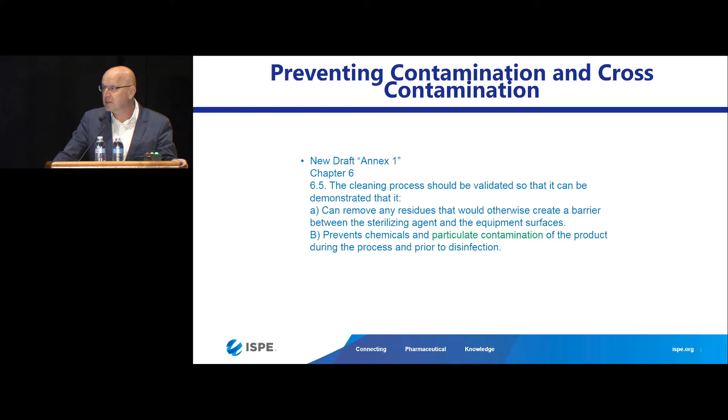As mentioned, my name is Richard Denk. I work for SKAN in the position head of containment, which means everything that has to be done on preventing contamination and also cross-contamination. We have heard this morning a lot about isolator technology. There's a lot in the draft Annex 1 about isolators. There's also mention of how to deal with highly potent substances, not much, but a little bit. My topic for the presentation is to explain preventing contamination, but then also what leads to cleaning and cross-contamination, because in the new Annex 1 draft there is a lot of mention of validation of cleaning.

So what were the current requirements? When we talk about aseptic isolators for aseptic processing, cleaning and disinfection are mentioned in general. That gets higher: in the new Annex 1 draft it is mentioned that this procedure should be validated, and this could be quite a challenge for a very complex process inside the isolator. And then afterwards we have an H2O2 decontamination. This is well established for isolators. More than 80% of all isolators are decontaminated with vaporized hydrogen peroxide.

But when it comes to potent substances, we have a few more challenges. One challenge is that we mostly have to produce those products in shared equipment or a shared facility. That means we have to take precautions regarding what we produced before the next product. Besides cleaning before disinfection to remove any bioburden, we also have to think about what was produced there, how toxic the product was, and what the risk is to the next product. And the risk to the next product is extremely critical in aseptic fill finish, because there we often have the container as the dose.

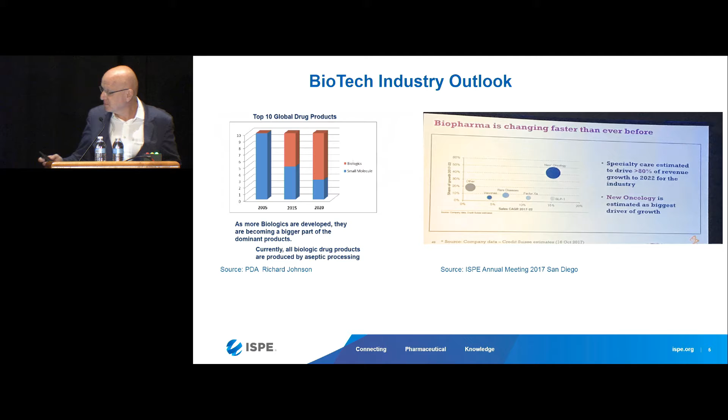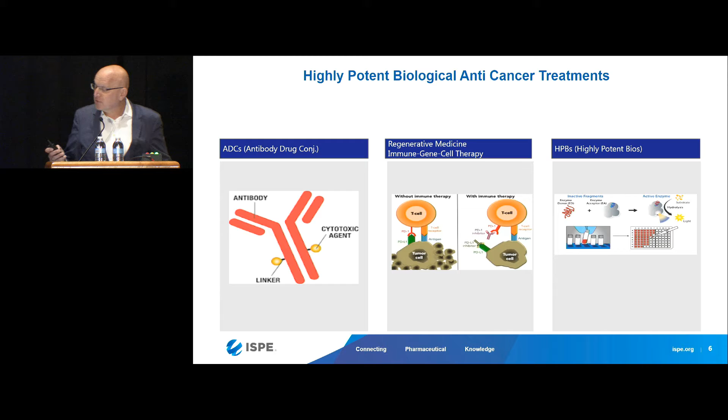So what makes them so critical? When we look at such a monoclonal antibody, which is attached here with a warhead or a toxin, this part makes that combination so powerful and also so toxic. Because this is a chemically produced small molecule which is linked to a large monoclonal antibody, and those are normally designed to specifically adapt to the receptor on the cancer cell, get inside, and then release the warhead to kill the cell.

And those toxins, when I present at such conferences where there are hundreds of people talking about antibody-drug conjugates, they always say we have the most toxic substance ever on the market, which is true. They were too toxic to be applied to the patient in another form, but most of them do not know how to deal with them and what it really means for the operator.

So, in general, containment, in my almost 25 years in that field, was in the beginning mainly driven by operator safety. We only spoke about how to protect the operators. This changed in 2014 as the EMA released the guidance on setting health-based exposure limits, because this guidance made containment GMP, since it requires permitted daily exposures for each product. And then the toxicologists have to develop a lot of data for this. It was first released in Europe, and in 2018 it was adopted by PIC/S as a guidance document. So in general, all PIC/S countries, which the US also belongs to, will be inspected according to this guidance.

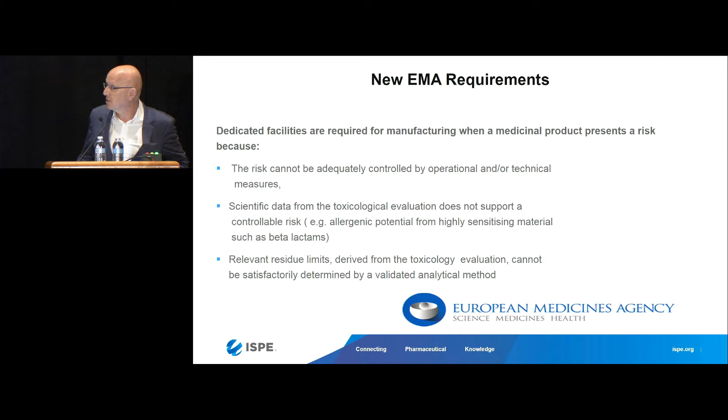So, as mentioned, I've been dealing with high-potent stuff for many years, and just to mention a little bit what could happen when ISPE is producing guidelines. The Risk-MaPP baseline guide was started, I think, in 2003 with the COP containment.

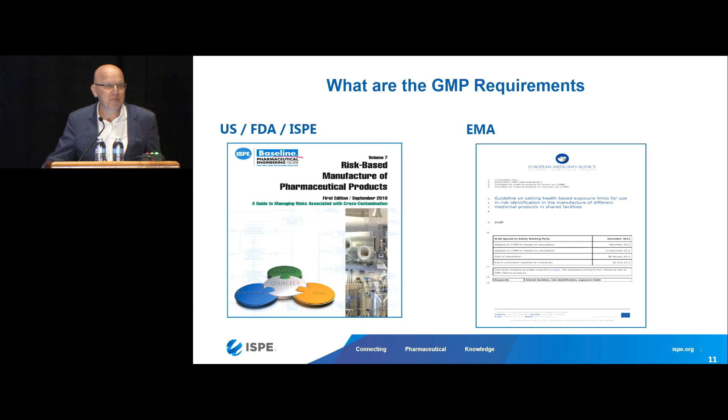It was then around 2006 first introduced to the EMA. In 2008, the EMA announced that they would revise their chapters. In general, the 2014 publication of the EMA guideline is similar to what was mentioned in the Risk-MaPP baseline guide. The only difference is the EMA guideline is mandatory, and the ISPE guidelines are mainly recommendations.

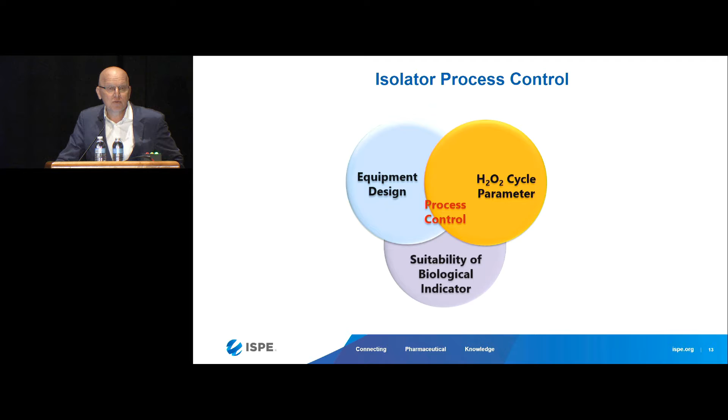So, to explain a little bit what we'll talk about, I would like to start and go quickly through decontamination of an isolator to get from there into the cleaning and cross-contamination part. In general, you provide an atmosphere inside an aseptic isolator where you decontaminate the surfaces, generally with hydrogen peroxide. You have to design the equipment inside so that it is possible to decontaminate. This was also a learning curve in the industry many years back, how to design surfaces and the equipment, and you validate it in general with suitable biological indicators.

So an isolator, I go a little bit quickly through, normally has HEPA filters in, HEPA filters out, and a terminal HEPA filter which provides the unidirectional airflow, which is mentioned in guidelines with 0.45 meters per second, plus minus 20%. And due to the high air volume, you normally recirculate the air.

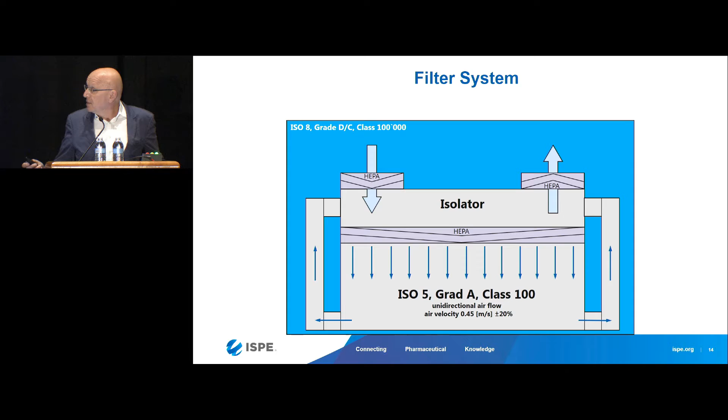And this has to be a little bit different when we talk about high potent, because there I teach that normally you have to isolate it in the smallest possible way. Every spreading outside of a critical area might be not easy to clean, and spreads product into other areas, maybe where other people like maintenance people could be exposed to it. And they often are not trained on how to deal with that.

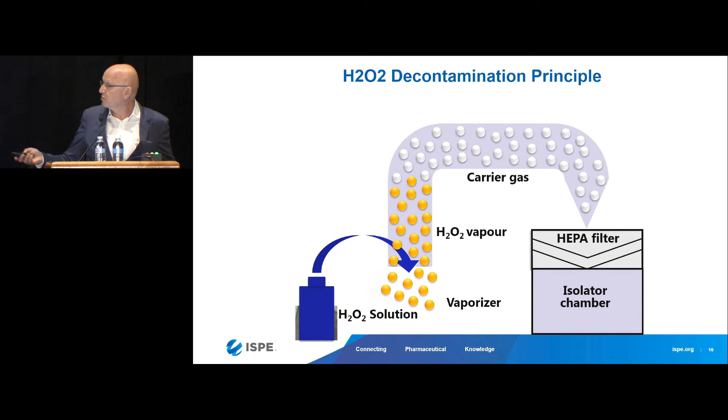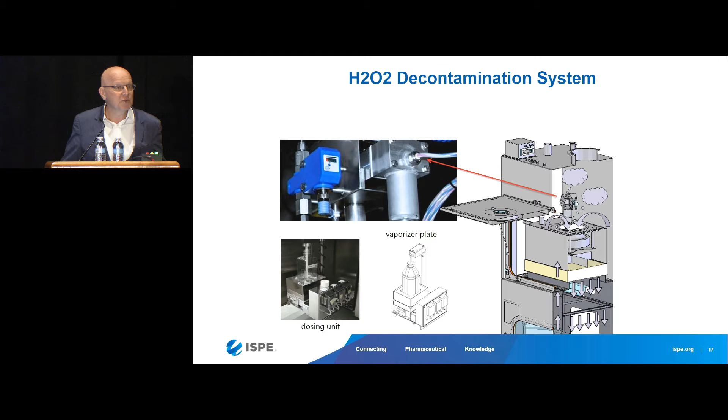So then you normally start the hydrogen peroxide decontamination. This is normally done with a bottle of 35% hydrogen peroxide; you vaporize it and get the gas through the HEPA filter into the critical zone, into the isolator, for decontamination. It's generally also called flash evaporation, because the boiling point of hydrogen peroxide is higher than that of water, and you pump the hydrogen peroxide with a peristaltic pump into the upper part of the isolator. On the heating plate, you flash vaporize it and get the hydrogen peroxide through the HEPA filter inside the chamber. It could also be performed in different ways. You can also get it directly inside the isolator. So those decontamination cycles are well developed.

It's normally done so that you make a leak test of the isolator first, make a preconditioning for temperature and humidity, and then you start the conditioning. That means you get the hydrogen peroxide inside the isolator chamber. Then you have the decontamination phase where you decontaminate all surfaces, and then you start the aeration to get the hydrogen peroxide out of the critical aseptic zone.

So I was recently asked, and it's always the question in such presentations, how innovative is the pharmaceutical industry? And I always say, when I go into the biotech field, I think it's the most innovative one. Because, as I mentioned before, I was many years in oral solid dosage forms. There, you had an agitator for the blending, and the most innovative thing was that you redesigned the agitator. This was then presented as the best you can get, and very innovative.

But within the biotech industry, when I look back, how fast all the disposables were implemented, how many new products you develop, which come to the market and sound very promising for the patients. The same here with decontamination of surfaces: the companies ask more and more for extremely fast cycle times, meaning very fast decontamination. And there is a lot of development going on, instead of flash vaporizing with temperature, using micronebulization, where very small droplet sizes are generated with a spraying system and directly injected into the chamber. It's quite important that these droplet sizes are in a specific range; the smaller they are, the better for fast evaporation into the molecular phase.

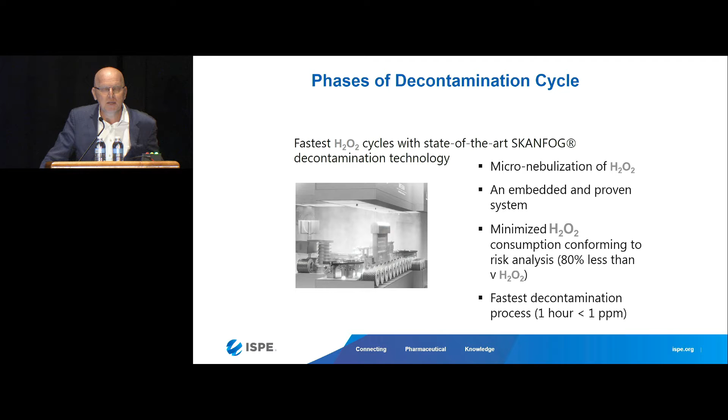So you spray them in, they get very quickly into the molecular phase and very quickly to the surfaces, and the larger ones are also important, because they need a little bit until they get to every area in an isolator, where they are vaporized a little bit later. So the distribution is quite important there. But with new technology, you can meanwhile reach decontamination within a few minutes.

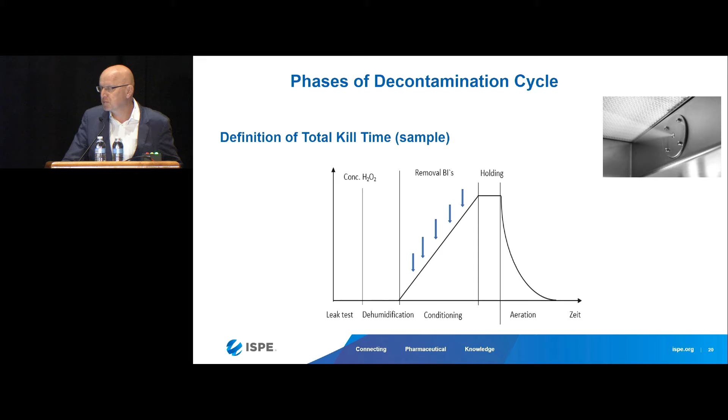Similar here, when you look at this, there is the same leak test, there is more critical dehumidification. Then you get, in a very quick way, the hydrogen peroxide in it, on the surfaces. The holding time, as I said, is minutes, then the surfaces are decontaminated. This also has the advantage that your aeration time is much quicker, because the H2O2 isn't absorbed as long on the surfaces as with the other technologies.

So, cleaning validation for non-product contact surfaces. This is also a lot of work I've been doing for many years, because it was not clearly defined how to deal with that. I remember companies asked us to provide a washing system for the filling line. And then I said, to what limit shall we clean this? And they said, what do you mean to what limit? Because we clean visibly. But what does visibly clean mean? This means only that you have removed everything that is visible on the surface.

There's also in the EU GMP guidelines, chapter 5.21 of part 1, mentioned, depending on the contamination risk, verification of cleaning of non-product contact surfaces and monitoring of air within the manufacturing area in order to demonstrate effectiveness of control measures against airborne contamination or contamination by mechanical transfer. Airborne contamination means of the potent substance inside. And we have in aseptic filling a lot of non-product contact surfaces. More than 95% are non-product contact surfaces, and some of them are also critical to open containers.

At that time, I set up an expert group where we worked a couple of years on how to define the rationale on cleaning close to open containers, which included very famous toxicologists from the company Roche, GMP experts, and also a GMP inspector we could get for our document. This GMP inspector, Rico Schulze from the German inspectorate, is very focused on cleaning and cross-contamination. As I told him what we were working on, he said, I would like to join your group because this is really a topic that was not covered so far. So then in 2017 we published this, and to give you a short introduction to what this means.

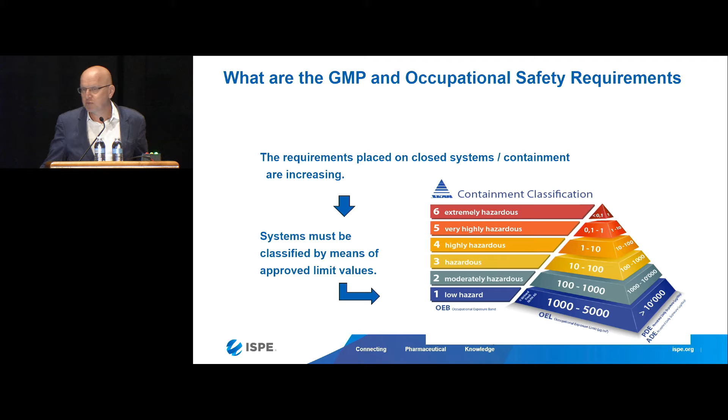So we came up with such a table in this document, and the publication was published by the PDA in 2017. It's the most downloaded document they have ever published so far. People are especially interested in this table, which gives the limits for non-product contact surfaces within isolators based on GMP and occupational safety criteria. And defining this limit gets more and more critical the more we leave the area of polished stainless steel, especially when we talk about cleaning of polymers, where the surface is not easy to validate.

So we have the same here for limits of public surfaces with uncontrolled access, more driven by occupational hygiene criteria. The reason is that people working in that area have uncontrolled access to contaminated surfaces. And this is also the reason why these numbers are 10 times lower than this one here, because people move around, can get in contact with the substance, and can leave the area uncontrolled to other areas. And then we also mentioned limits of airborne API inside isolators after cleaning, to avoid airborne contamination or contamination risk to the next product.

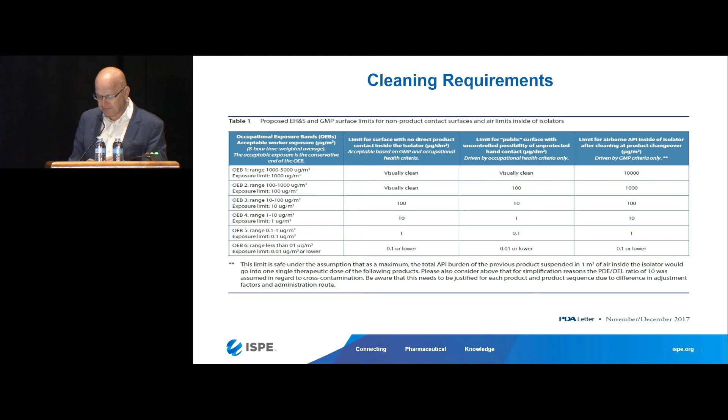So this was published with the PDA Letter, and I also introduced this last year at the conference for the first time. It was then mentioned by Pink Sheet afterwards, what we have done here on this document. In the meantime, it is translated into German and also into Japanese. It was introduced in Japan a month ago, because there was such high interest in how to deal with that.

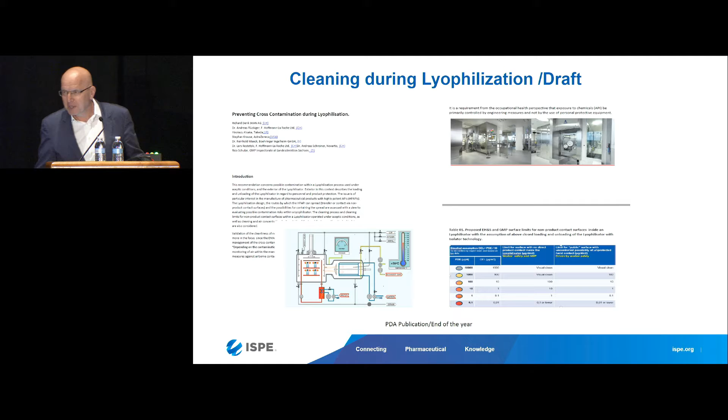So what else is coming? There will be another document about cleaning within lyophilizers, because there is also a high potential risk. You have an open vial during the whole process where you get the vacuum on it, where you release the vacuum, and this is also a source of contamination. So this will also be coming to the industry soon. And other documents will also follow on how to protect the product and also the patient.

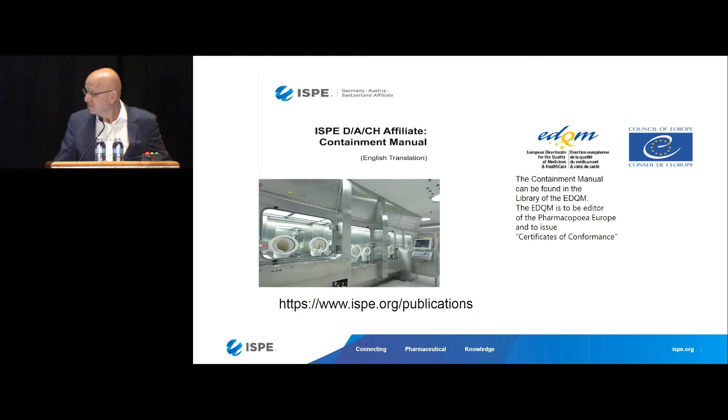So for those of you who are interested in more detail on containment, this is also one of my babies. I published in 2015 the ISPE DACH containment manual with my local expert group. We have this already in translation. We work on the next version together with David, our next speaker. And what we're also proud of: this is the only document which can be found in the library of the EDQM, the European Directorate for the Quality of Medicines and HealthCare, and the EDQM also publishes the European Pharmacopoeia.

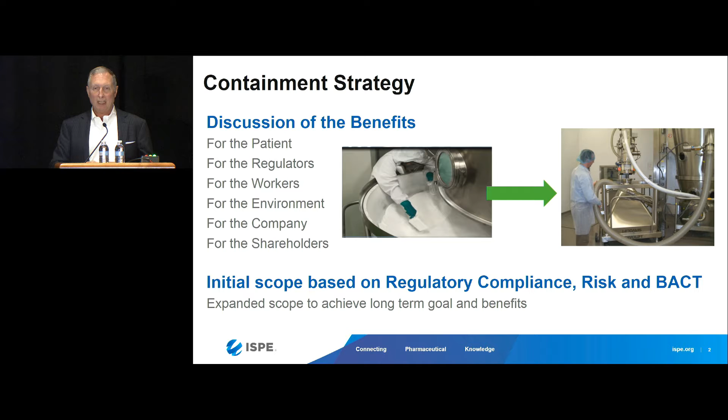I talked to Rick briefly about the fact that technology like this increases the speed at which you can do research and development, so it gets your products to market faster. And then I'm also going to show you, as part of the cost-benefit analysis, that it decreases turnover times between batches, it decreases the amount of time employees have to spend gowning in and gowning out. And I think there's value all up and down the chain to the company and the shareholders.

So we kind of divide it up into small molecules, oral solid dosage. I know this is an aseptic conference, but there's things to learn from OSD. And then the liquid, the aseptic process also benefits from containment. And most important is the pilot plant.

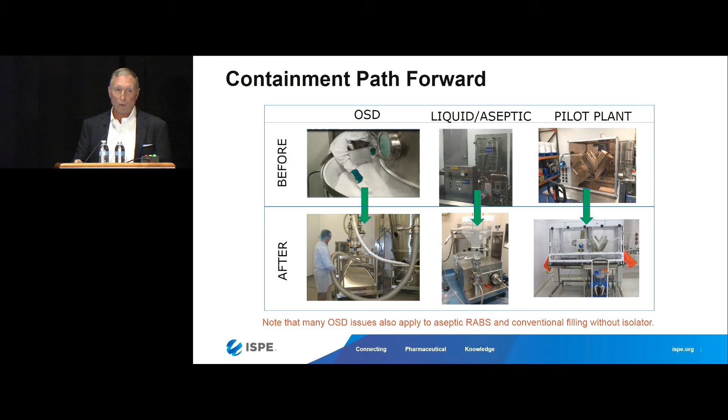One of the first things we did at Allergan was bring the pilot plant up to the latest technology. And I did that from a selfish point of view, because I knew if we developed the processes using contained technologies, they would enter into production that way and I wouldn't have to worry about retrofitting later. So investments in the pilot plant pay back even more than investments in operations.

I stole this slide from our site in France, and they stole it from a guy named Todd Conklin who talks about a new view of safety. And what he basically says, and I think it applies to quality even more, is that we have certain processes that we know are fragile. They're often out of spec, and they're non-robust. So it's pictured here as a table with a ball on top, and that ball is going to roll off that table very easily. And as you make investments in containment, the processes get more and more resilient, more and more robust.

So stable is where most of our processes are now, where there's some open steps and some closed steps. And as long as we follow procedures, as the FDA knows, everything is okay. But the smallest mistake can drive that process into problems. And then the best processes are the ones that are resilient - they tolerate small mistakes by operators.

I often say that if you've got a contained process, it prevents the powder from getting into the breathing zone of the worker. It also keeps the worker from getting to the powder or the product. You can't drop a pen in a batch that's fully contained. You don't have to worry about diversion of opioids from contained processes because the employees can't get to them. You don't have to worry about taking the pockets out of their uniform so they can't steal tablets if they can't get to the tablets. And so what we're shooting for here is resilient, robust processes, and I think as a direction, nobody can argue with that.

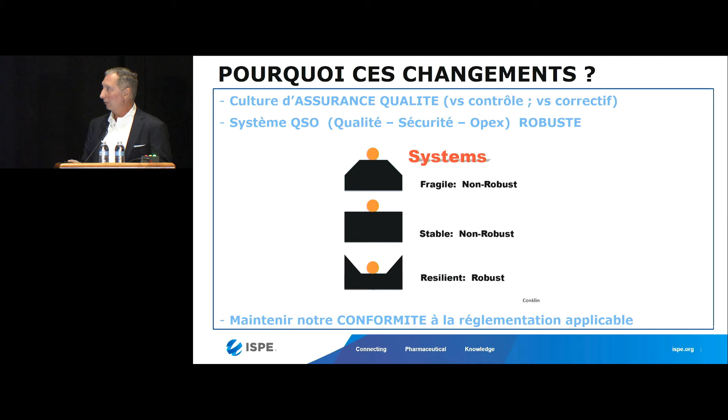So in this baseline guide that we're developing in cooperation with the DACH affiliate, we want to document the value that comes from containment. And it starts because, you know, I'm a board-certified industrial hygienist, so my first concern is the patient, my second is for the employee. If we can eliminate PPE, then we eliminate the potential to make a mistake in wearing PPE.

We know that workers often, because PPE is uncomfortable, take shortcuts. I was guilty of this when I was running long-term clinical trials of very potent products back in my Merck days. If the room is very warm and you're wearing a full-face negative pressure respirator for 8 hours, you literally end up with a puddle in the bottom of the respirator.

So the easiest thing to do to make it more comfortable is just loosen that bottom strap, and then you can get some fresh air coming in without having to come through the filters, making it much more enjoyable to do your work. But of course, you're exposing yourself to the product. If we had a contained process, you wouldn't need the respirator in the first place, and you wouldn't be tempted to take shortcuts around use of the respirator.

I'm also going to show, and I think you'll be surprised, I've run into GMs before that have said a respirator costs $35 and a containment system costs $1.2 million. And I said, you're underestimating the cost of a respirator. If you've got a respirator and you're compliant with OSHA European standards, you've got to have medical clearance, annual training, fit testing, and you've got to be changing the filters on schedule. You should be taking the Tyvek off the calf of a PAPR every time you exit a room and go back in next time. These costs add up dramatically.

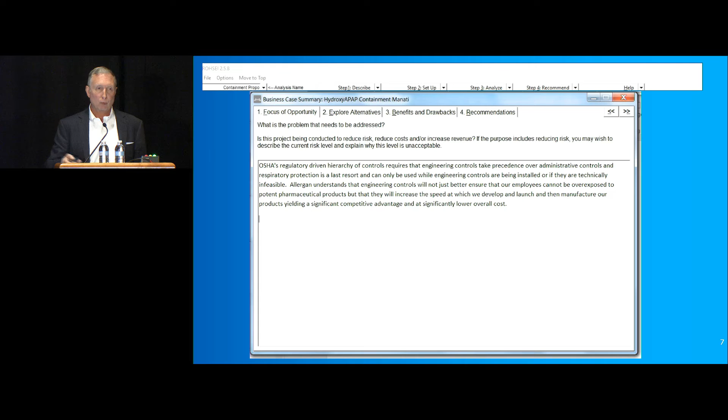This basically lays out all the reasons why you should be doing containment, and tells you the different aspects we're looking at. For example, we're looking at the amount of time wasted for operational personnel to get in and out of the gowning room, the amount of time spent on training for respirators when you don't need respirators, and the loss of raw materials and product yield because you've got open systems.

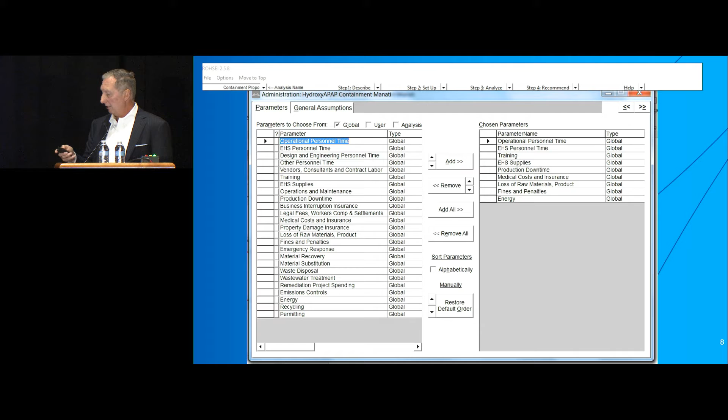This is a 10-year analysis with a 7.5% discount rate, a 2% inflation rate, and a 37% tax rate, obviously in the US. And the fully loaded hourly rate of a typical operations employee, not at Allergan but in the industry, is about $40 an hour.

Then what we do here is put out in English what we're looking at as part of the analysis, and I'm going to show you how we put these details into the algorithm. The cost for moving that process, and this was quite a while ago and these sites don't exist anymore so I can say it freely, was about $1.2 million investment in the kind of stuff that Richard sells.

The benefits, though, are first of all improved product yield, and we didn't know this until the first year was concluded. The general manager at that site came back to us and said that essentially the yield went from the low 90s to almost 100%, because of course the process is fully contained. When he added it up for the year, it came out to about 5,000 kilograms of an API.

I wanted to take credit for the value of those tablets on the market, but they gave me credit for the cost of goods instead. So about 3 cents a tablet is what it cost us to make that particular product, but we saved, by the site's calculation, 13 million tablets. So that goes into the calculation.

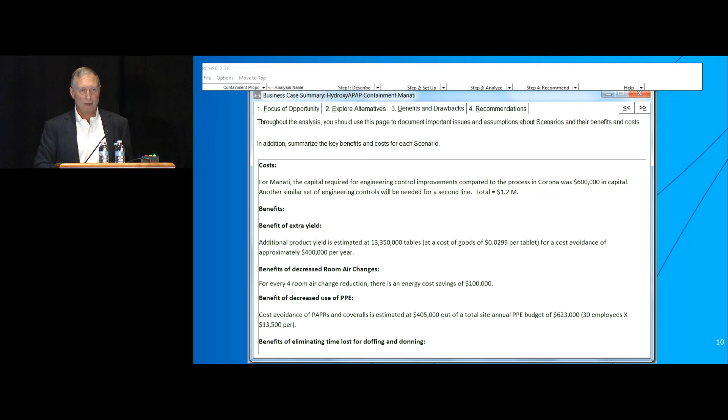So again, we're going from this to that. This is all we're doing. And then if you want to look at other benefits, so you don't think of PPE as being very expensive. I mean, a single Tyvek bunny suit doesn't cost very much. But when you've got 30 people using 5 or 6 of these a day, and if they're doing it as per most of our procedures say, they're throwing them away as they come out. You know, we're not trying to reuse those.

And if you're doing the same thing for the outside of a PAPR, and you're buying booties and gloves every time you go in and out, that adds up. And I was very surprised to see when we did the math, it came out to be very, very high numbers of PPE, in the hundreds of thousands of dollars.

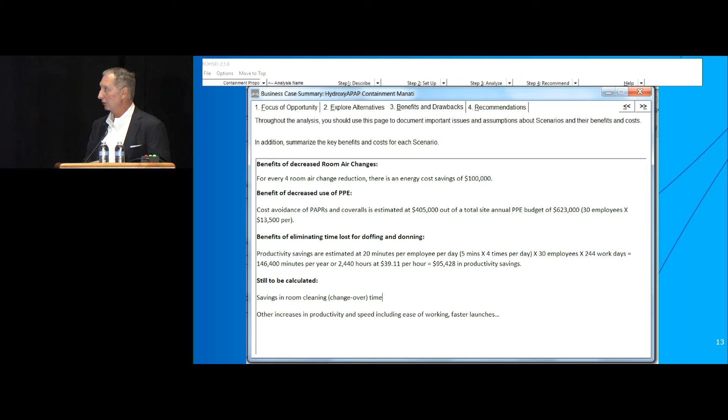And then you get benefits of eliminating this time, scrubbing into GMP, and coming out and throwing all the stuff in the appropriate containers. And though it only seems like 5 or 10 minutes at a time, when it happens 4 or 5 times a day, and more often if you drink 3 cups of coffee before you go in, these guys are constantly going in and out, they're using a lot of PPE. They're also spending a lot of time getting dressed and getting undressed when they should be making product. And if you add that up across a fairly large size site, it turns into a head count or 2 of wasted productivity. Right?

And then we didn't even include savings and changeover times because we decided to do the exact same amount of cleaning between batches, which I felt was unnecessary, but quality thought was the safest thing to do. We still cleaned the room with the same tenacity as when there was powder all over it. I would argue maybe you don't have to do that. And then, of course, you get products to market faster, and we didn't include that in the calculation.

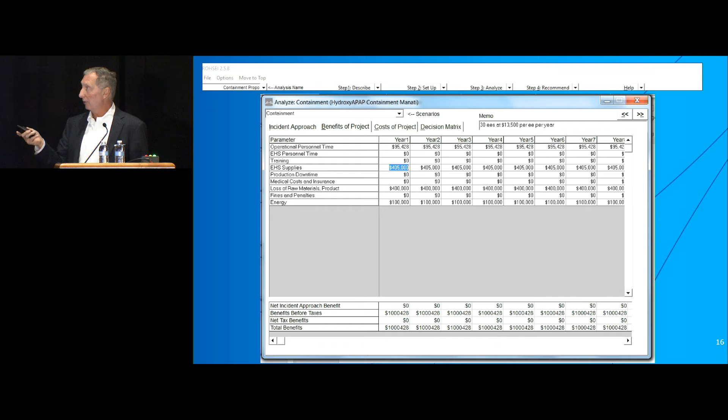So if you look at it this way, if you just do that 20 minutes a day times 30 employees times 244 days times $40 an hour, you're saving in the range of $100,000 in operational personnel time. If you look at the EHS supplies per employee going in and out all those times, you're saving about $400,000 a year in PPE supplies by just going to a lab coat and a hairnet and safety glasses.

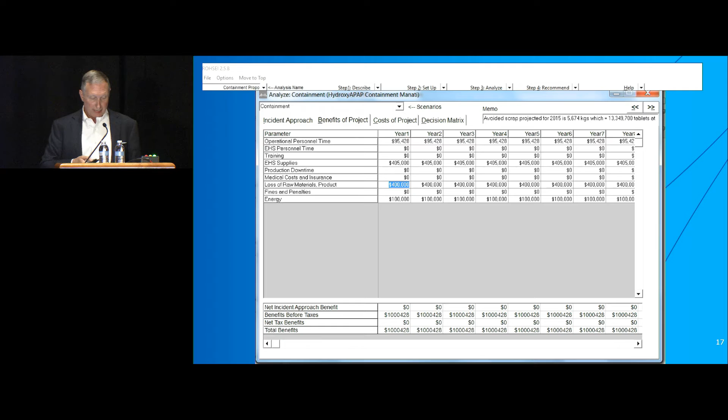If you look at that 5,000 kilograms just at 2 cents per tablet, you're saving about $400,000 in cost of goods for the API. And finally, if you can reduce just 4 room air changes per hour in Manati, Puerto Rico, you're saving the company about $100,000 in energy costs and contributing to less greenhouse gas, which all the millennials like, which decreases your turnover rate.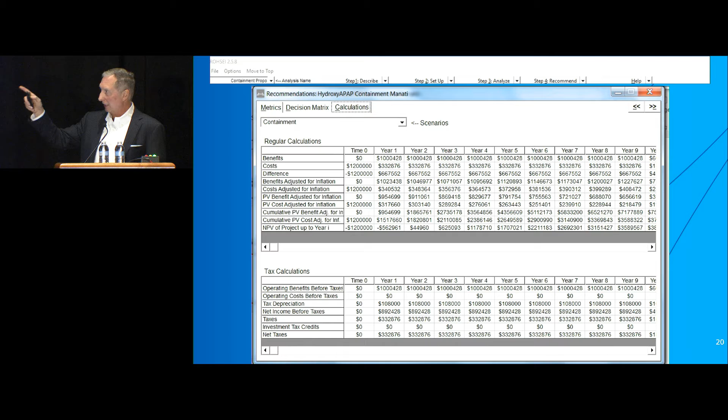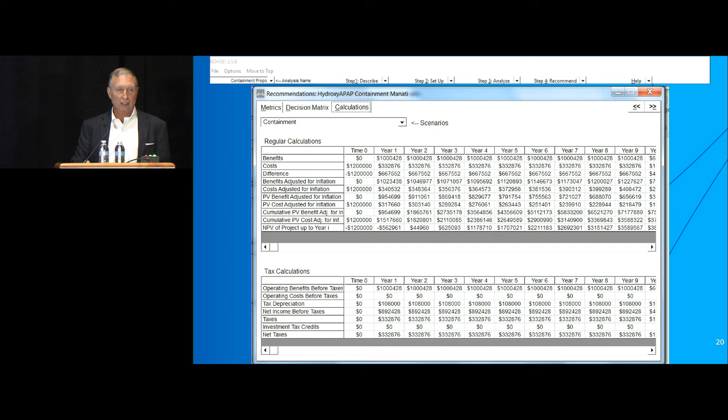And then this software that we use actually does the calculations for you, and whenever I get a raised eyebrow from the CFO or from one of our accountants, I take them to this screen in the software and I let them pick any one of those points and do the calculation on their calculator, and it's precise.

So the bottom line is that making that $1.2 million investment resulted in a net present value to the company of almost $4 million. And I had a COO at the time that had some challenges in making budget, and he asked if we could count on that money. I showed him the analysis and convinced him that we could. It's got a 55% internal rate of return, 100% ROI, and a discounted payback period of 2 years.

So I've got 5 minutes left. I'm just going to show you the same thing from the aseptic side. So this would be a site that we have that's considering this investment, and I did the exact same analysis for them. This basically is weighing in an isolator, transferring it through containment into the mixing vessel, and then adding the diluent, get the mix started, then out through the wall into the RABS unit. And this is all done in a contained fashion now.

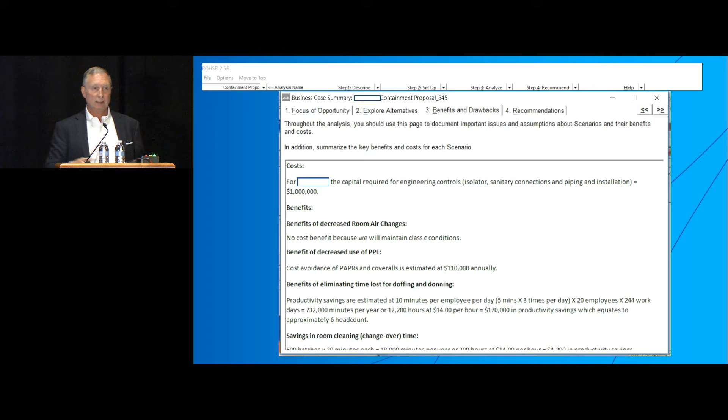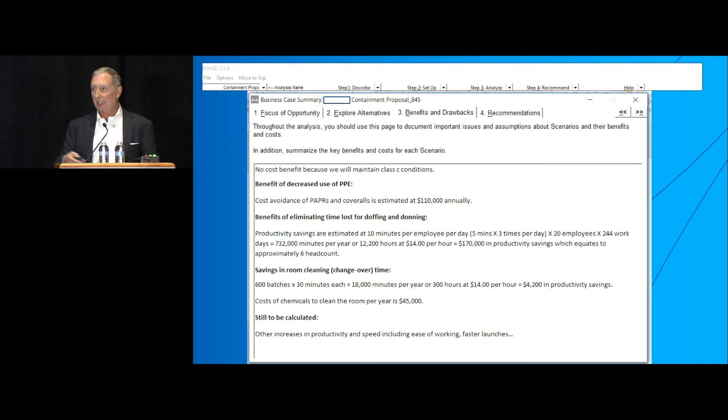And so it's exactly the same costs and the same savings for that process, though because the API is much less quantity, you don't see the huge savings based on increased yield. But you do see the savings multiplied when it comes to getting in and out of an aseptic area versus a regular GMP suite.

So I'll just go through these quickly and show you that even for an aseptic process, it saves close to $1 million in net present value to invest in an isolator and split butterfly valve technology to get the API into the mixer and then out into the RABS unit. So I've got 3 minutes left. I'll just finish up with a summary here.

I would argue that having the information that the CoP group generates on the exact performance of the technology is very, very important in making the proper choices and convincing your management to make the investment, but equally as important is this value proposition. If you can go back to your management and show them that on a day-by-day basis they're saving money, they make the investment and sooner, and as I say, there's no buyer's remorse. They know they're doing the right thing for the patient, but how do they justify it to the CFO? And I think I've given them the method to do that.

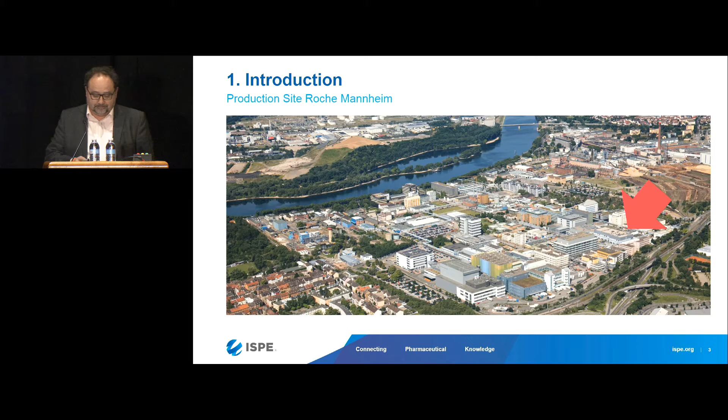So here you can see our production site in Mannheim, and where you see the arrow, this is the plant we built. This plant has 5 floors. We have 2 basement floors with change rooms and technical rooms for clean media, and also cold storage and small production. The main floor is the production floor on the ground floor, and above that we have a very high technical floor, mainly for air conditioning.

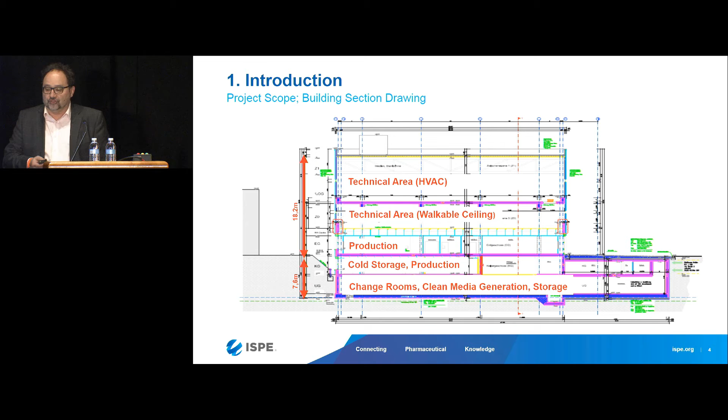And here you can see a cut through this facility. We have the 2 basements. And here you can see the freeze dryers with the condensers, and here you can see the distribution of the air ducts, and up top you can see the freezing units and the air conditioning units.

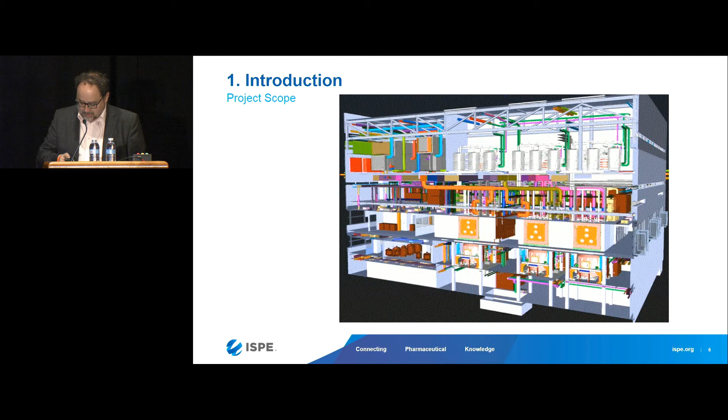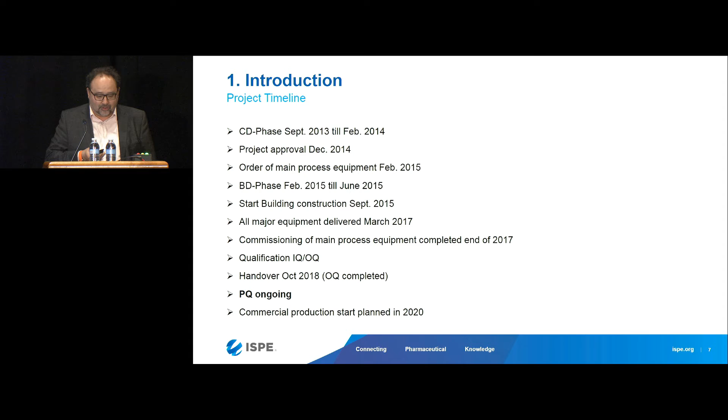So first, I want to introduce to you the project timeline. We started the CD phase in September 2013 till 2014. Then we had a stop of the project, and because the approval was in December 2014, and we ordered, then everything had to go very fast.

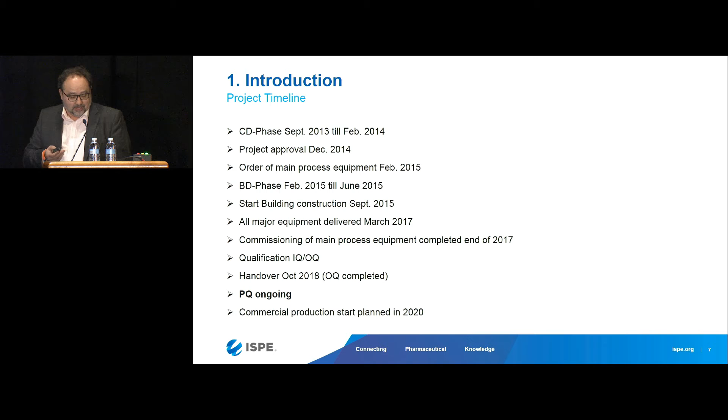We ordered the equipment in February 2015, had a short BD phase till June 15. Then we started construction of the building in September, and all major equipment was delivered in March 2017. So then the commissioning ended end of 17, then we did the IQ/OQ, and handover was in October last year. That means OQ was completed. At the moment we're doing PQ. Some of the PQs have already been completed, and we plan to start commercial production in 2020.

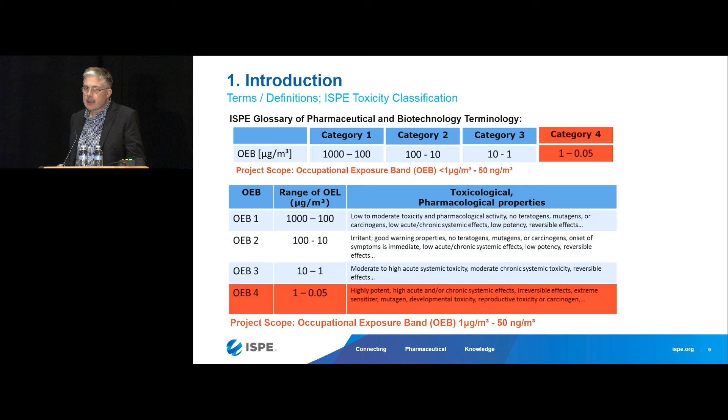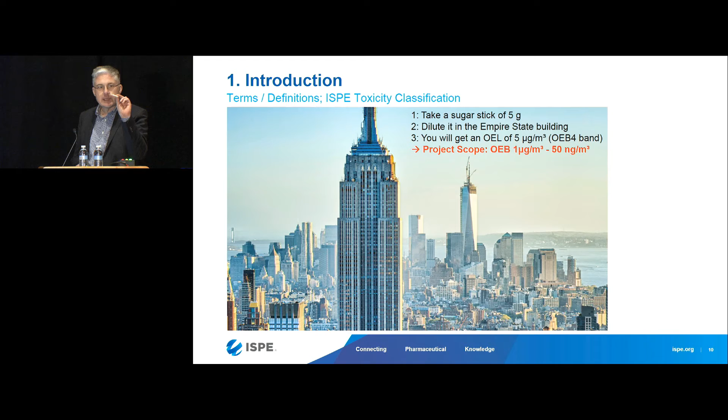And in order to illustrate this, because usually what is 1 microgram? This graph shows this quite nicely, because otherwise this figure is quite difficult to understand. If you would take this very famous building, it has approximately a volume of 1 million cubic meters. And just from the break, I got this sweetener, and this sweetener contains 5 grams. If you would dilute these 5 grams evenly in the air of the Empire State Building, you would get 5 micrograms. This should just show you how much you have to do in order to secure this kind of containment safely, to have a safe place for the operators working in this facility.

Also, this was mentioned quite a couple of times. We did a lot of thinking in the beginning about how we can elevate this facility up to a next level of security in order to enhance what was already established in the industry. And in this first thinking, we came to the conclusion that for sure we don't want to have personnel operating with personal protection equipment. We want to have a primary containment, which is a local containment, basically an isolator or a closed system, which is maintaining during normal operation a safe place to work. So therefore the primary containment design goal was to establish a system that enables all the operators to work in this facility without wearing any personal protection equipment.

But of course, you also have to consider that something can go wrong, and therefore we have established what we are calling a secondary containment, or a second layer, in case something goes wrong, either by operator mistake or by technical errors. We wanted to have around the primary containment a secondary containment, which ensures that, for example, if we have a larger breakage and an exposure of a high potent substance in the room, this contamination is not spread out in the entire facility and remains in there. Of course, in that case, people have to go in with personal protection equipment to clean it up, but we are sure that it will not be spread out further.

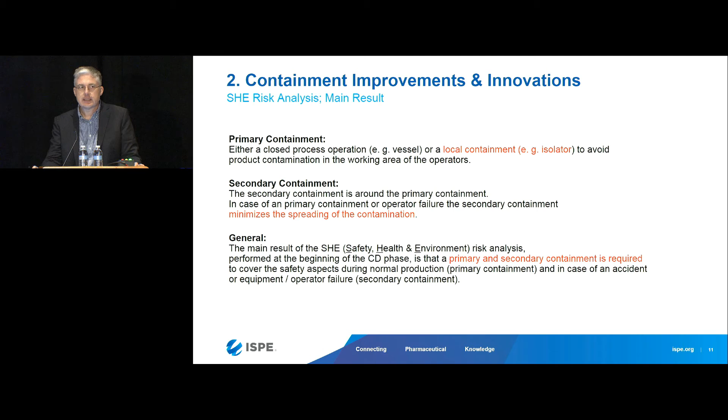We did this in a quite extensive SHE risk analysis. We did this first in the conceptual design, but then very intensively and thoroughly with all the equipment suppliers in order to discuss all the technical details, how this containment can be solved best. Also, quite unusual compared to other projects, we made a very intensive pre-engineering study. Basically, we selected 4 vendors, 2 for the freeze dryers and 2 for the filling lines, and made a very extensive pre-engineering, because we said we cannot just write down a user requirement specification, hand it over, get a quotation, then order it. Since we want to establish a new level, we really had to work together with the supplier to achieve a consolidated view of what such a system should look like and what the performance should be at the end.

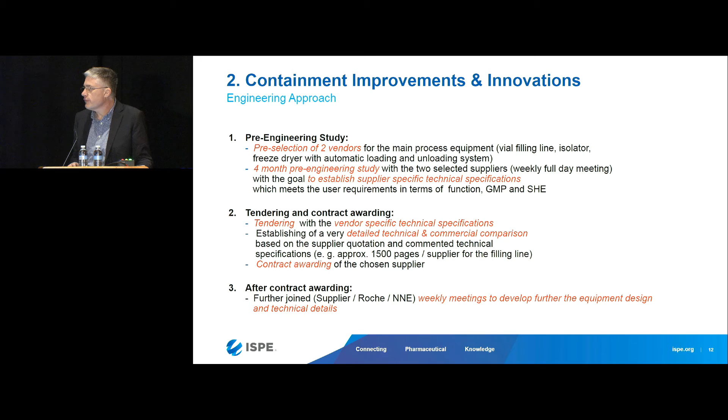After contract awarding, certainly we did not stop the work. It was even more intensified. We had weekly meetings with the filling line supplier and also the freeze dryer suppliers in order to ensure that during the design phase we once again revisited the EHS issues, certainly also the GMP issues, to secure that everything would then at the end work to a safe system.

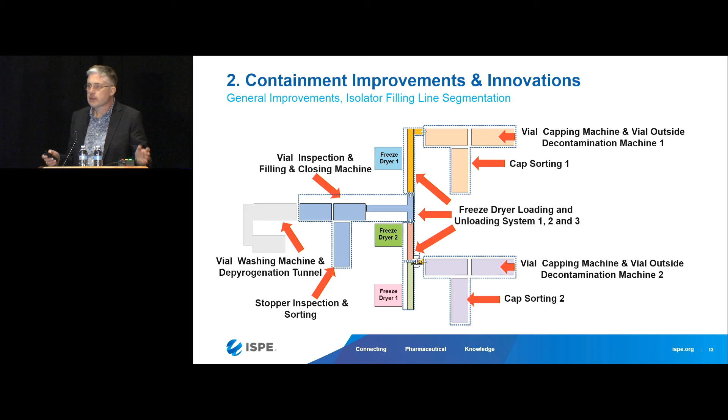So this is it at the end, and this is a very, let's say, rough picture of the filling line, which we call the lobster because of the shape. It consists of 3 freeze dryers, and the different colors you see here are different isolator sections. We said right from the beginning we did not want a single isolator system, because this is not controllable. So we had a segregation right from the beginning in order to minimize contamination.

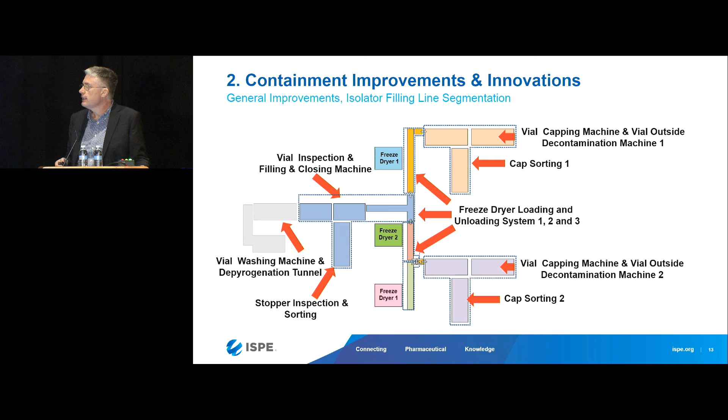It was the prime goal right from the beginning to avoid contamination, and if we have contamination, to minimize the area which will get contaminated. We will show later some pictures of how we achieve this, in order to minimize cleaning, which is costly, time-consuming, and not easy.

In regard to containment improvements, I cannot go through all these issues. If you look at what we call the action list, which is basically a minutes of meeting protocol with the suppliers, there are more than 1,000 points, for example, for the filling line. We discussed quite a lot of issues. Just to take out one: we have completely avoided any kind of vacuum systems on our filling line in order to avoid that the vacuum system would get contaminated, which we would have to clean afterwards.

And also these 8 other points mentioned here were machine optimizations, which were not there before the project, and which we established together with the equipment supplier to enhance it to a next level of security. We call it high potent 2.0.

So then it's up to Wolfgang to show you some containment improvements. We are very limited in time, and we will show you now 9 things a little bit more in detail, where we definitely think we have gotten improvements to the design which was available before. If anybody has further interest to deep dive in one of the topics, you are more than welcome to contact us. We are here today and tomorrow, and we can discuss this offline. But time is limited, unfortunately.

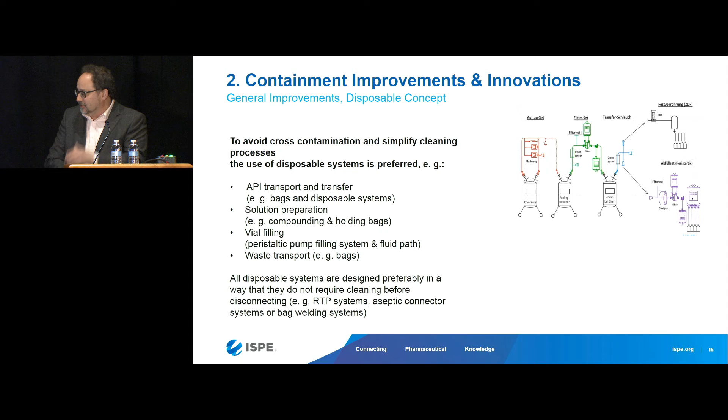So one of the improvement possibilities is to use disposables, because you don't have to clean them. Very simple, and that's what we consequently did. We can use this line with stainless steel vessels or with disposables. But we decided to have every fluid path, and you can see the different colors, as a disposable, and we don't have to wait long and do CIP cleaning. We simply throw it away. So this is the main thing here.

Here you can see one of these disposables. This is the most important one, the filling disposable, and you can see this is the wall of the isolator. This is what's outside of the isolator. The disposable is brought into the isolator with this bag with the alpha beta port, and these are the filters and the needles, everything we designed for use in the isolator. I think it's a very important detail if you use isolators for high potent purposes.

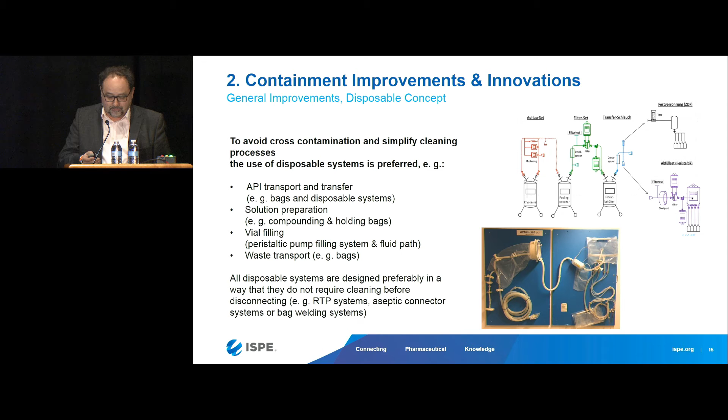Another detail is how do you clean such an isolator? We're mainly cleaning with purified water. We could also use some CIP fluid, and we wash all the surfaces of the isolator and also the ducts. The outside ducts here have nozzles, and they are also cleaned after every process. Then after that, we dry the isolator with pressured air. Then we have no risk anymore for the operator. Then we can open the isolator and do a manual cleaning and format change. Then we dry it with the HVAC, and then we do the hydrogen peroxide decontamination.

So here you can see another detail where we have the bag-in, bag-out filters. They're directly connected to this outside duct, and up to this flange we clean the whole isolator. This is a picture of our freeze-dryer loading system isolator, and here you can see, for example, where we pull out the air, these outside ducts, and this is also the pusher for the freeze dryer.

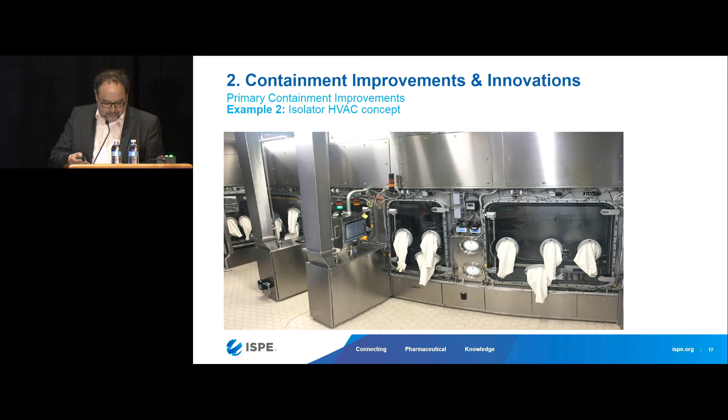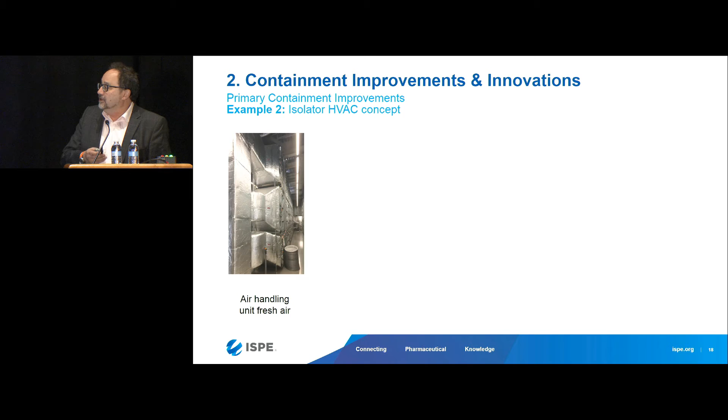So now I want to tell you how the whole airflow of the system is. Here you can see the fresh air handling systems. There are 3 HVAC units above each other. Then you can see the same picture again, where we go in with the laminar flow above, outside channels, and then the ducts out to the isolator. Then you can see the bag-in, bag-out filters.

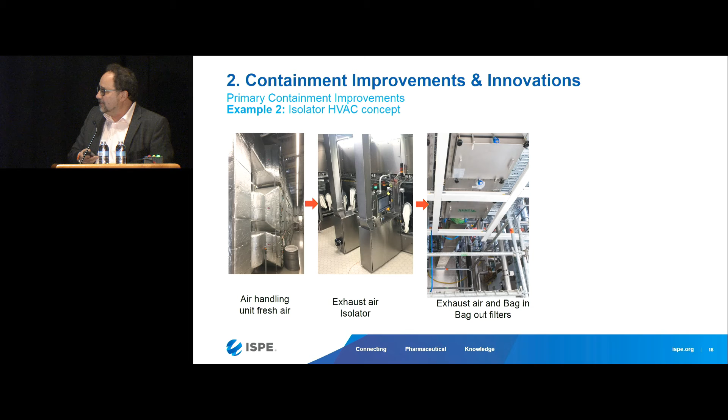This is a very important detail in our feeling, because these open to the clean room. Because if one of these double bags tears in the technical area, we think it's a very big risk for the facility. And so we decided to open these bag-in, bag-out filters to the clean room, because if something gets spilled there, I think it's a very much lower risk.

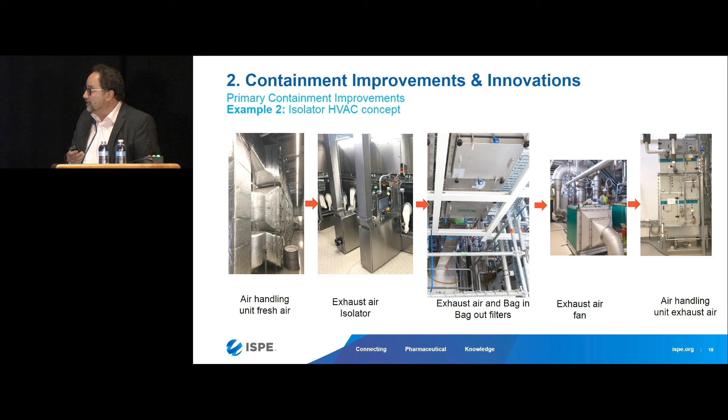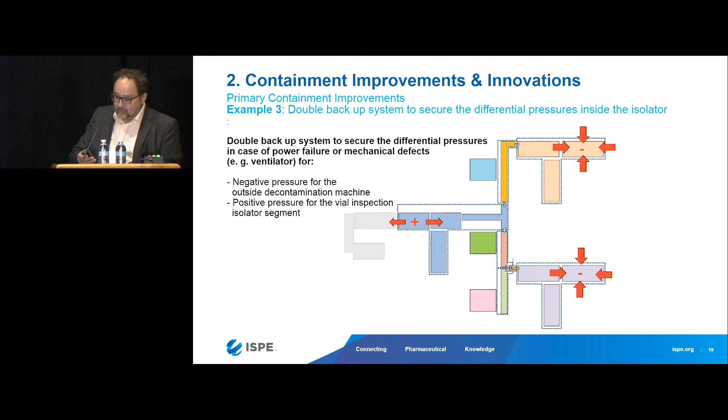Then we have an exhaust air fan, and we have an air handling unit for the exhaust air. This is only necessary to recover the energy. So this is another detail to ensure the pressure in these 2 important areas, in the tunnel and in the outside washer. We need an overpressure or an underpressure, and therefore, even if we have a UPS backup for electrical current, we have an additional system with compressed air to keep it fairly safe in the over-under pressure mode.

You have a lot of hidden surfaces. And certainly during capping, we have freeze-dried vials, you will have breakages, then you will have powder on the machine table. So we said, even though it was said by the supplier that this is their isolator version, this is not a good high-potent solution. And therefore we said we have to change the design of the machine significantly.

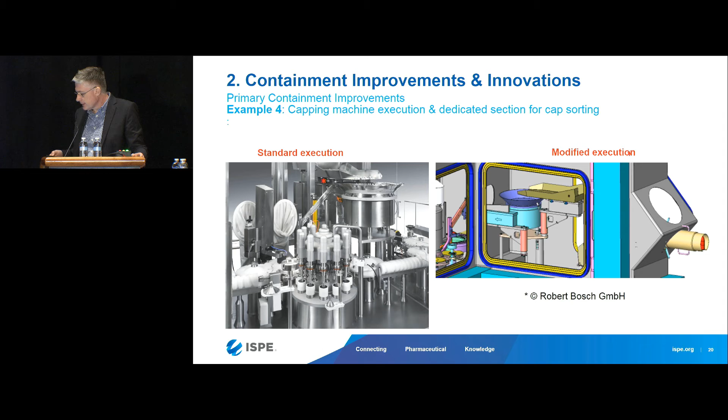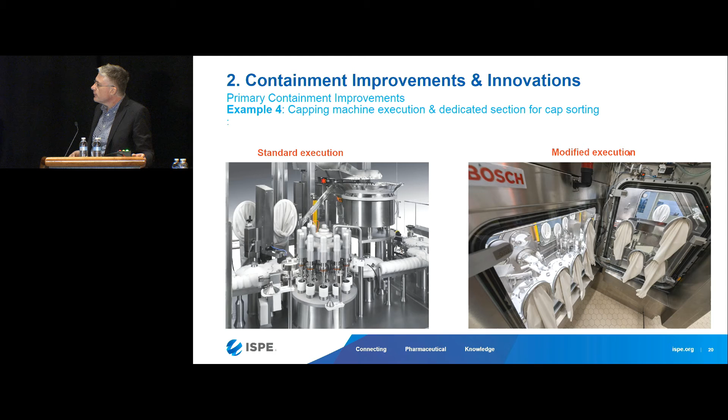And by doing this, we reduce significantly the installation density on the contaminated part, where we then said at the end during the mock-up study, yes, now we are at a level where we can really say this could be cleaned by the operators, of course, where the isolator is still closed. This was very difficult to photograph, but you see here the actual result, where this is the contaminated part, and this is the non-contaminated part, and as said, we have a pressure segregation in between these two isolator segments.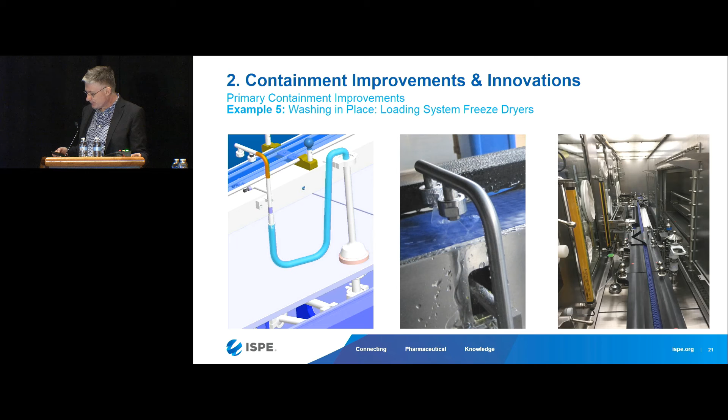Next one, I think this is again yours. Now we are coming a little bit more into the freeze dryer, and as Richard was saying, the freeze dryer is also highly contaminated, and therefore we made a lot of efforts here to improve the cleaning of the freeze dryer itself, but also of the technical systems of the freeze dryer.

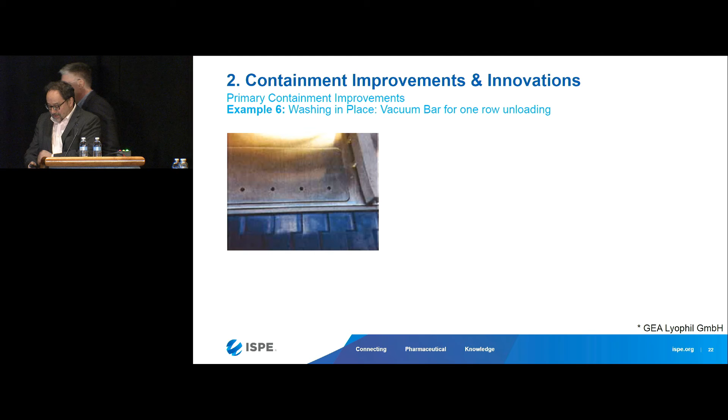So this loading system has a vacuum bar that holds with these holes, sucks a little vacuum there, and holds the vials in this position before they get to the belt and the unloading process.

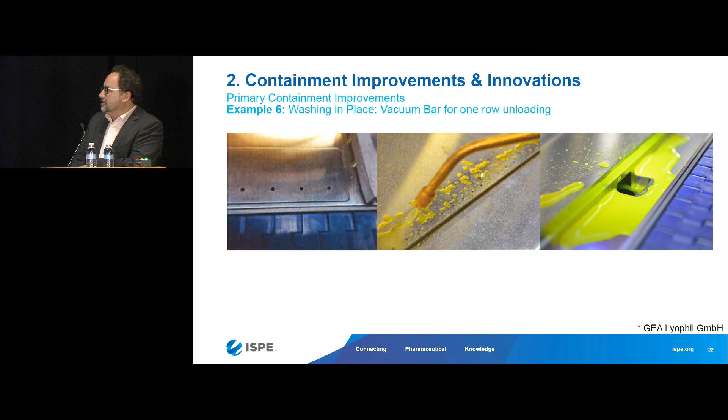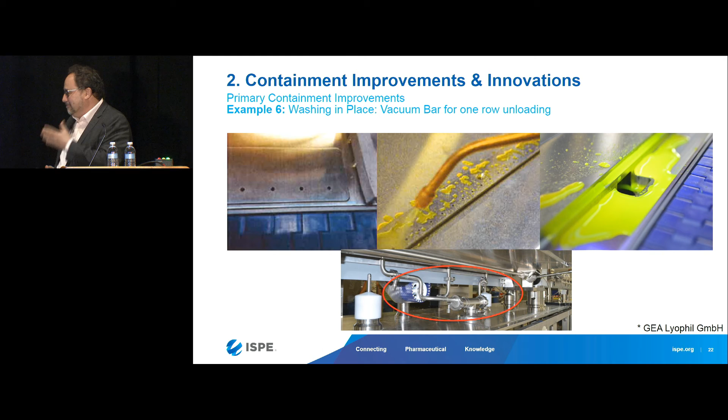And there, because you suck away something, we also had to validate that we can clean it, and you can see the test with riboflavin here. This is what's below this belt. Cleaning the belt would normally mean, without this spray, that you have to hold the spray ball for 5 minutes in the hand, and I think this is a very important thing. This small investment with this automatic system really makes sure that it's held for 5 minutes.

This is the pusher system for the freeze dryer, and you can see that we have many nozzles that clean this system. Here you can see a picture from the FAT. There we put a plexiglass panel so we could see how it really gets clean.

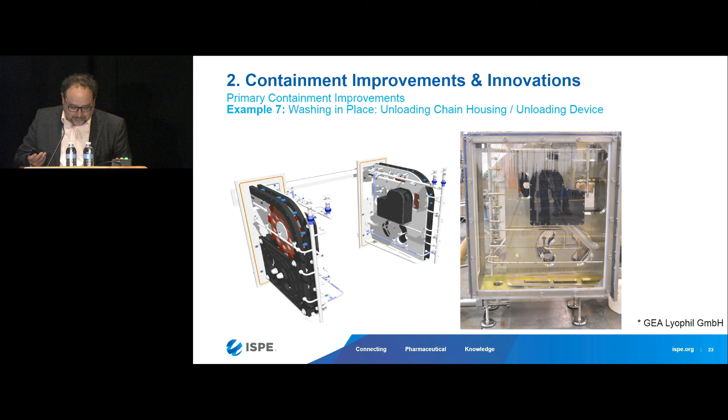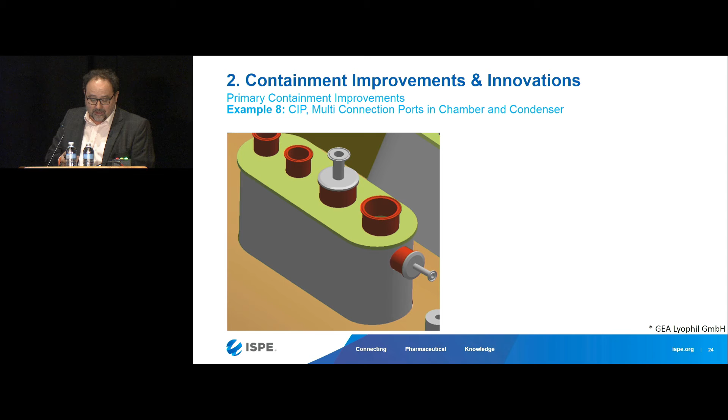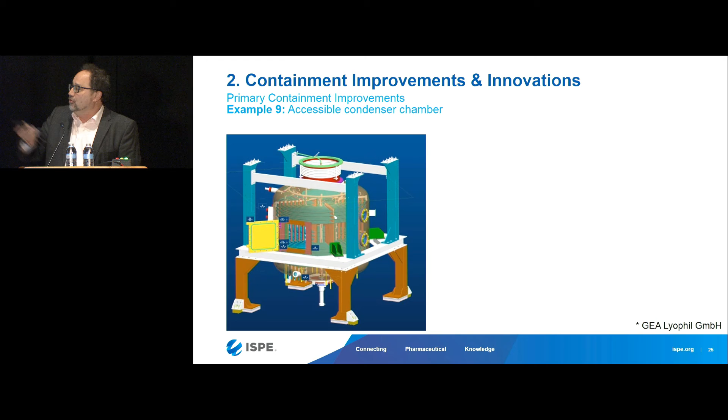Another improvement is we have, I think, the first condenser that is really accessible. Most condensers you cannot climb into, so you cannot prove that there's no high potent substance inside. So we designed it with an accessible door, 60 centimeters, and you can go in that way. To prove that you can really get in, this is Ben Jacobi from NNE, and he really went in, and you can do swabs and really prove in the cleaning validation that nothing is inside the condenser.

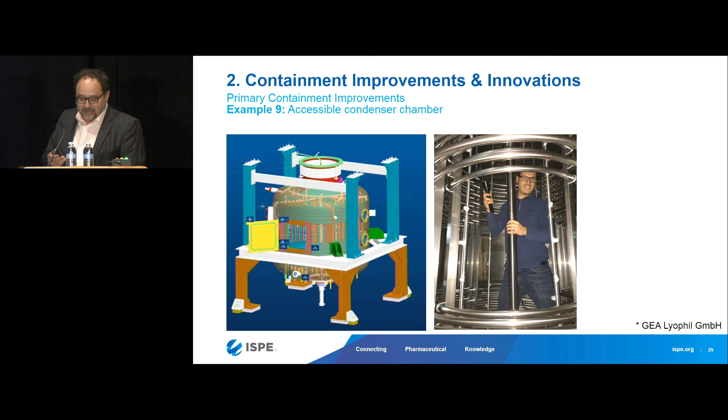So another problem is the vacuum system. We said we always want to have 2 filters in a row, because if one breaks, then nothing goes to the outside. When we told GEA to build this, they said, okay, this is the biggest vacuum filter we have. This one has such a high pressure drop that there is no vacuum pump in the world that can handle that. So what we did is we designed the vacuum pumps in a cleanable way, and then have an additional security HEPA filter as a bag-in, bag-out filter on the pressure side, and that's something the vacuum system can handle.

So this is how it looks in reality. You can see how big this first filter is, and it was also a very interesting technical task.

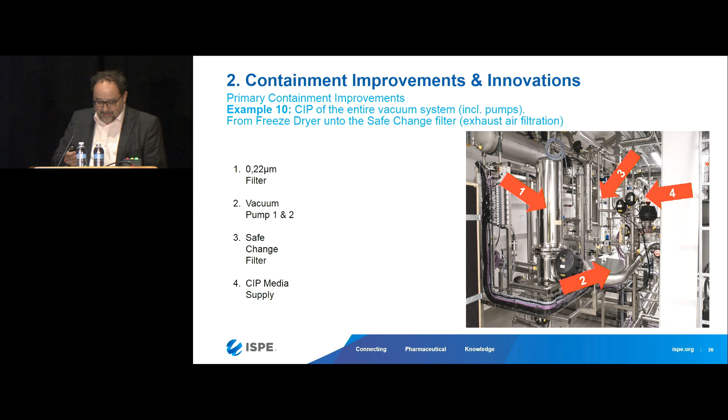Okay, then we want to do this together.

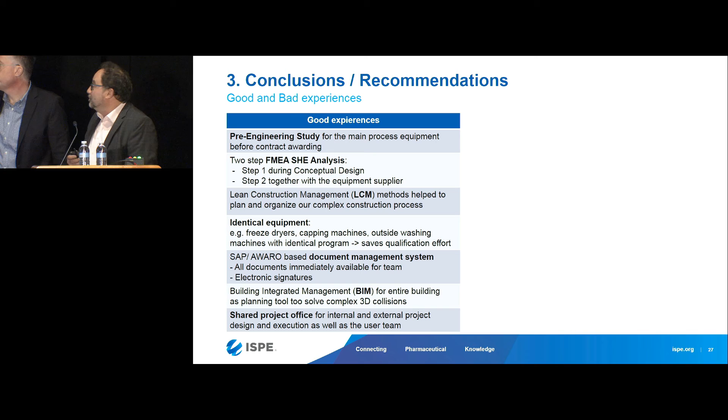As Hartmut already said, the pre-engineering study for the main process was very important, and I would recommend doing this again. Also the FMEA—we did a separate FMEA only for the SHE task, because it was our first high potent project in Mannheim. Of course, we did an FMEA analysis for the sterile, aseptic part as well, and it was very challenging to do that. We did this with the suppliers, and I think this is a very important thing. What we learned is that every supplier had different solutions, and we wanted to take the benefit from these discussions as well.

So if I look at the time, just a few other points where I think it was really beneficial to the success of this project: certainly the complete design was built using integrated management, so that we had a complete 3D model of the entire process system as well as of the technical systems.

We had a shared project office during all of this time, meaning internal and external engineering resources from Roche and from the contractors. We were sitting all together in one office, which enabled much better communication, much more intensive communication, and therefore, I think, even in the coffee breaks there were a lot of good solutions developed during that time, so that helped quite a bit.

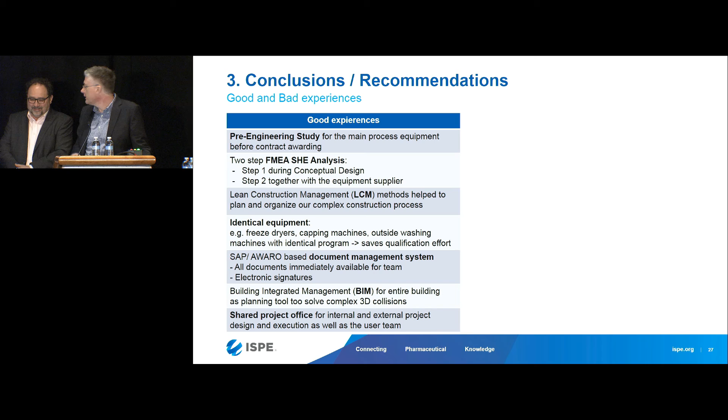And then we had a very sophisticated document management system. You will be shocked if you see the number of documents which were generated during this project, and without these systems, I think we would have been totally lost.

Anyhow, so last but not least, I hope if it is running, there would be a short video, and then Wolfgang will just say a few words on the video so that you really see what it is. I just wanted to let it run to get an impression, and we can start the discussion during the time that the video is running.

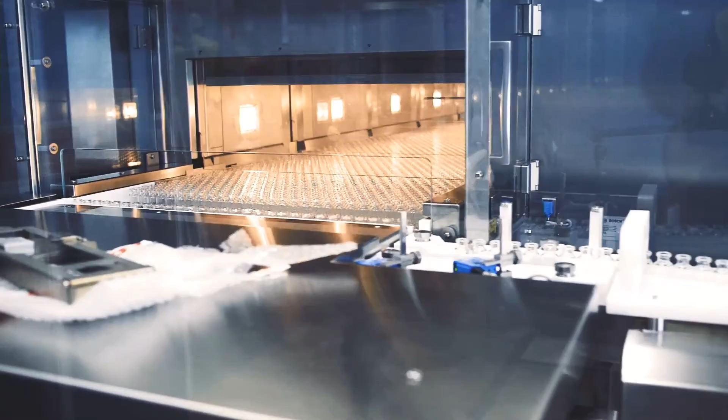Oh, it's already stopped the video, though. Was it? They stopped the video. They can let it run. So you can still let it run during the time we have the Q&A session, yeah.